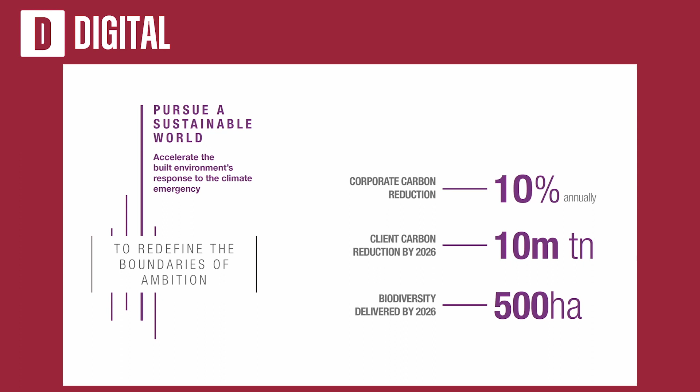So the first one's pursuing a sustainable world. The second one's more around growing together. And again, you can see that we've got some KPIs here, some measures, some metrics that flow down from the strategy through into my objectives, my team's objectives. So again, you can see it's not just what we do going to work every day to go deliver assets, it's to go hit these KPIs, and again, how it links to our innovation strategy. And then the final one.

This is probably particularly close to my heart as head of digital, delivering distinctive value, and very much around good days at work. How do we improve or increase our client satisfaction? But then some really tangible ones around annual margin growth, and is clearly called out there our R&D investment by 2026, and I'll describe how we manage that and how we grow that shortly.

But it all ties into our sustainability goals, our ESG framework. So again, just sort of reinforces KPIs with real numbers that we're all measured against. So we have to find ways to deliver those, and we're not going to achieve that through traditional ways of working.

So hopefully, you get that what I'm trying to do is set the scene as to why innovation is important. I'll now spend a couple of minutes talking about Mace. So I'll describe some things that I didn't know about before I joined, but again, we'll start to provide context for why our innovation strategy is the way it is and why it's so important.

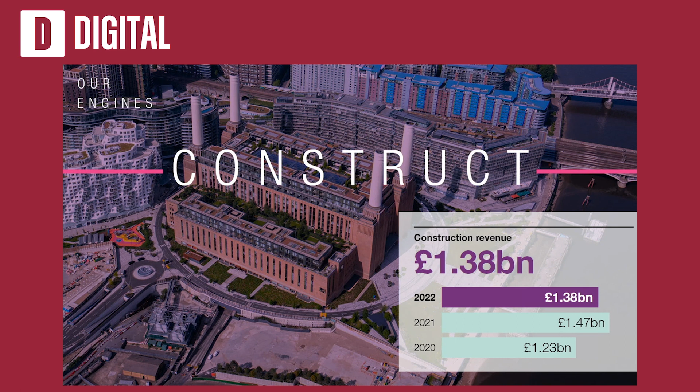And then a little bit about our performance. So there's the two engines. We've got the consult engine, that's the one that's rapidly growing at the moment. And the construct engine is probably the one that we're most famous for. And then here are some of the achievements of how we're stacking up to those priorities and those KPIs. So over the last couple of years, we're continuously on the right direction to achieve those targets.

So that's the reason for taking you through that, that's sort of setting the scene, and I'm hopefully in sort of 2-3 minutes there or 5 minutes, you've got to sort of understand the why. Does that make sense? You can sort of see why innovation is important to Mace?

Okay, very good. So now we'll start to look at the how, and I'll take you through some of the history. So back in 2017 was the first innovation strategy at Mace, and it was around 4 key themes.

So the first one around digital technology. Second one around assembly. So this is where we're starting to introduce the idea of modern methods of construction, offsite prefab, all the things that we're seeing now. Operate was key. It was a key business unit within Mace that was sold at the end of last year. But the thought and the thinking that goes behind it is still relevant.

We're working with our clients every day to help them understand what's going on in the operate space. How do they get better outcomes from the assets that they've created? And then finally around lean and continuous improvement.

So if we take those 4 themes, I'll show you how they've grown over time. We've got a number of innovation multipliers.

If we look at the type of work that we do, we're obviously involved in the design process. We then plan our work and then go deliver that work. The innovation themes were then seen as multipliers for the work that we do.

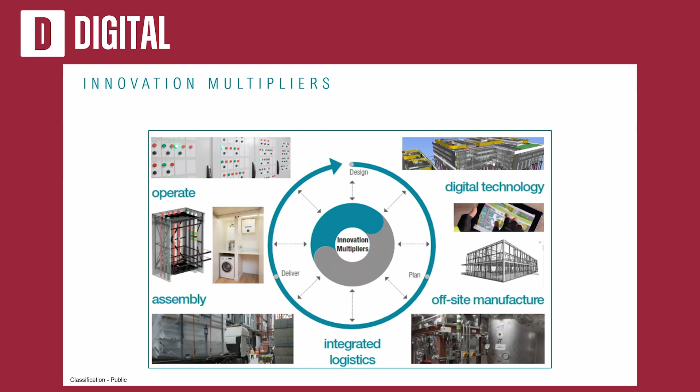So I'll take you through the journey of why innovation became important, and talk about the more recent one, how that accelerated our innovation journey. There's a number of projects here - we'll talk a bit about the Shard, we'll talk a bit about the Jump Factory. We've got a video to show you there.

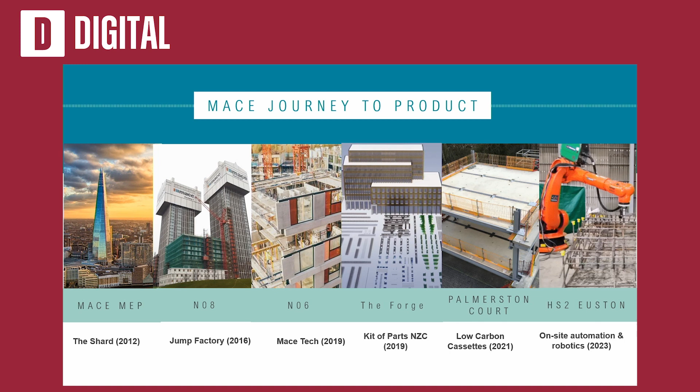Mace Tech is where we then spun off a separate business around the innovative ways of working that came from the Jump Factory. Then it starts to get a little bit more digital as we talk about the kit of parts at the Forge, and then the heavy focus on reducing carbon, example there at Palmerston Court, and then some of the robotics that we have.

Very early on, in order to deliver the Shard - super complex project, very compressed timelines - again we had control of the MEP delivery ourselves. This is one of the first steps into prefabrication and off-site assembly to go deliver that.

I'm sure if you delivered it you wouldn't say it was simple, but it's a fairly simple concept around using modular plant rooms and the equipment that goes within that, and then how do we get that through the building in the risers. A lot of thought went into how do we assemble that not at the workface but somewhere else, and then get them to the project, and the components used within that.

That's really where a lot of the initial thinking around how we bring innovative ways of working to our project sites came from. What I'm going to go on to next is an example of the rising factory. It's a bit long, a couple of minutes, but what I think it does show is how we've turned a process that might take 2 or more months to go up a floor into something achievable within a week.

And if you enjoy construction, like I do, you'll enjoy it. It's all about how we created a sort of factory-like environment on a live construction project.

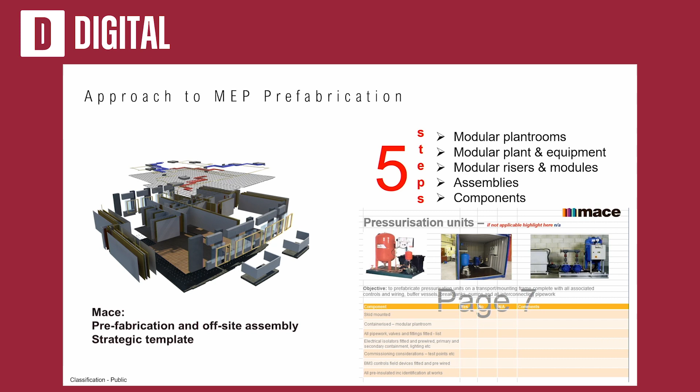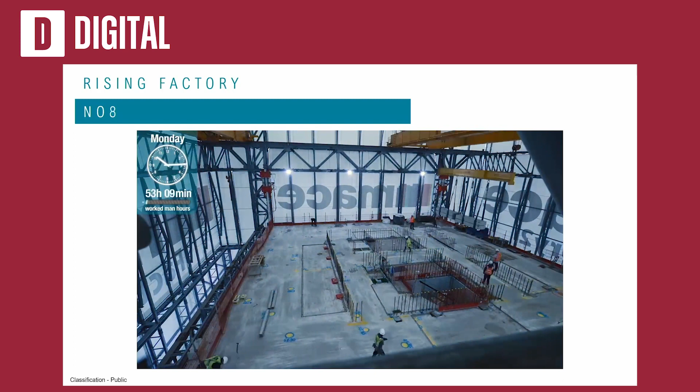There we go. One thing I will point out, if you look to the top left, you can see how the hours are moving.

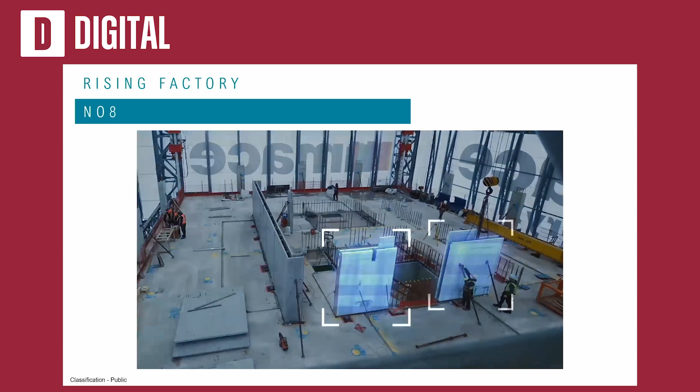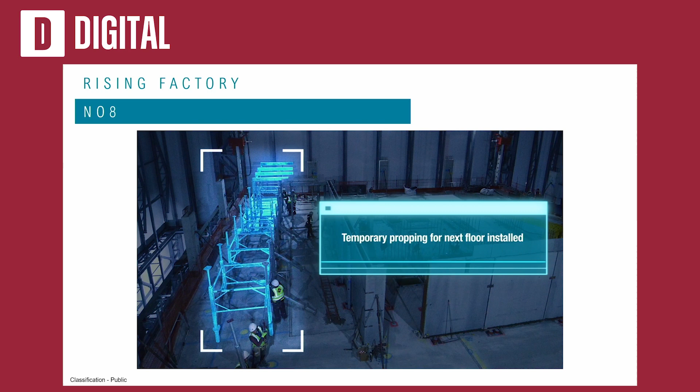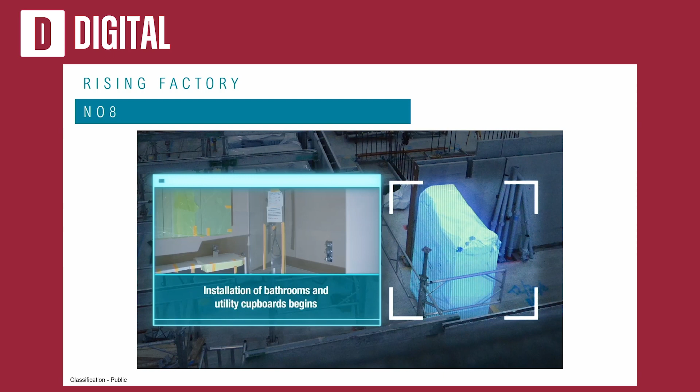So this is all at the top of a building. You can see the way it's encased and covered, so the feeling is that it's a controlled environment. It's trying to replicate a factory type environment on a live construction project.

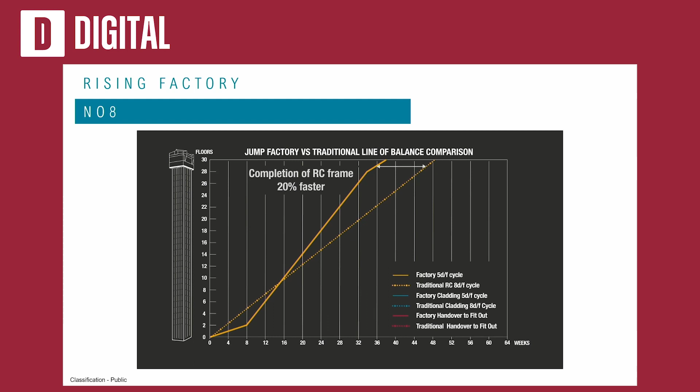So apologies, it's a bit of a long video, but what I do like about it is when they move the factory up, it looks like the floor dropped, but that's not the case - that's the structure moving up.

You can see a lot of work then has to go into the pre-construction phase. You're spending a lot of time planning it out and making sure that you've got all the right parts in the right place before you start construction. It can be concerning - people want to see progress straight away. But it was a useful exercise to go spend the time, go prove the concept, and then deliver in a much faster time.

I think one of the things that's disappointing, it always hurts me when you see the wet concrete getting applied at the end. You think, well, that's a real shame to see that. But I'll show you what we've done around that shortly.

But digital was one of the key elements in this. Part of that was creating the kit of parts, so having to work out exactly what all the different parts are and how they go together, and then how we could bring that to assembly off-site. I'll start to show you some of the other areas we've started to work on.

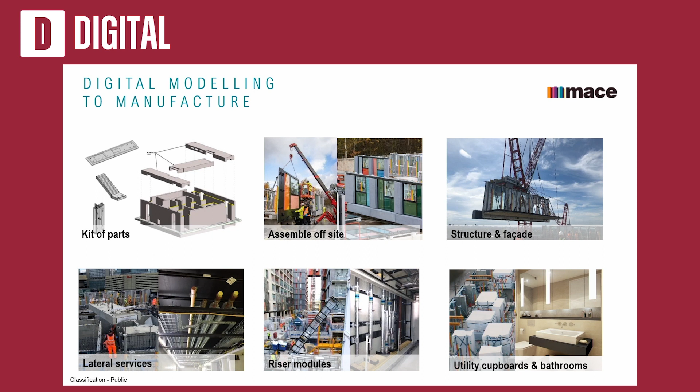Here's an example of the infrastructure that's required in order to do that. That's the yard, where I'll be able to show you the path of materials moving through in a moment.

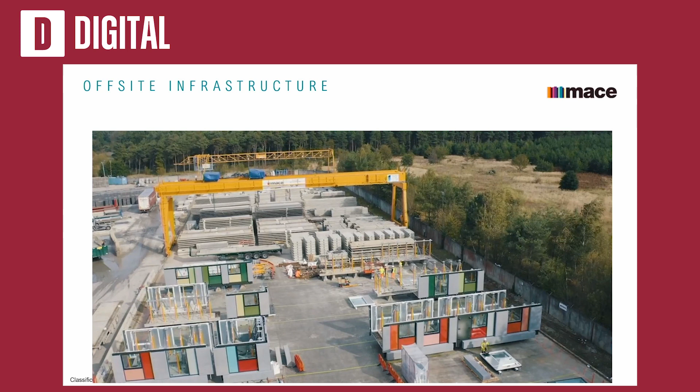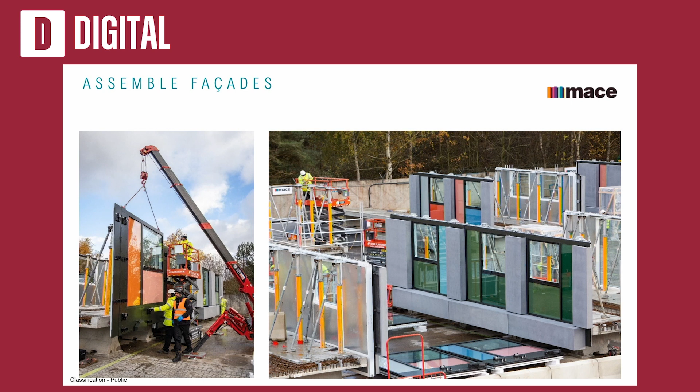But it's not just concrete and MEP that we're doing this for. We've now started, for some time, if you're particularly interested in facades, doing the same with facades and starting to understand what that looks like in assembly.

If you get a chance on the way home, go to London Bridge and stand underneath the Shard, you'll be able to see this in action at the moment on one of our projects there. It was great, I was there a couple of days ago, and as a bit of a geek, stood there for 20 minutes watching all these panels go in and get erected.

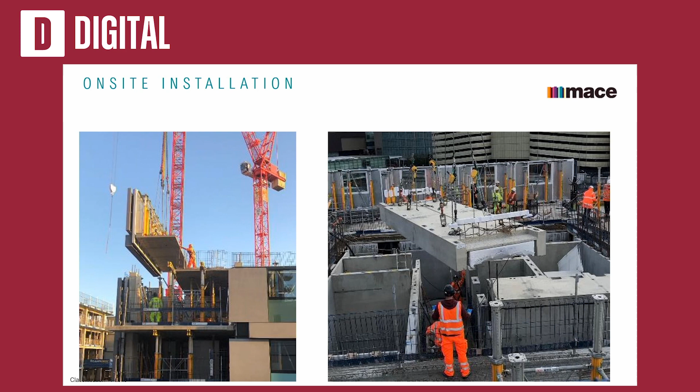There are lots of areas where we've been able to use this way of working. I'll move on to tracking and logistics. It's pretty hard to see here, but what we can do is track the path of one of these units as they make their way through the manufacturing and assembly process.

So here is where everything is cast, and everything is then tagged, so we can see when it's created. We can also see how that's working during the design process, but when we get to the physical world, once it's cast, we're able to start to track it.

It then goes into the Mace Tech supermarket, where all the materials are, and as they get assembled, we keep scanning the tag to understand where they are in the process, until eventually they get lifted onto the lorry so we know where they are.

We can then track that through until it gets to site. That's very important, especially in London with congested projects. Just-in-time delivery is super important, we've got to make sure the hook is there ready to go, so we can get just-in-time delivery going.

We can see it land on the building and see where it gets installed. We can also use that to see when it's been tested and we're happy with it. So yeah, we've got full transparency of where we are in the process.

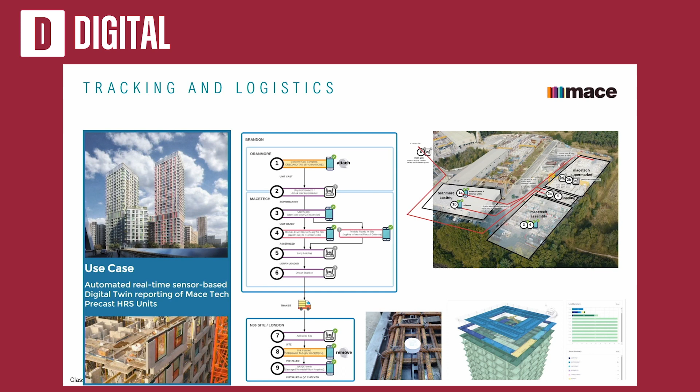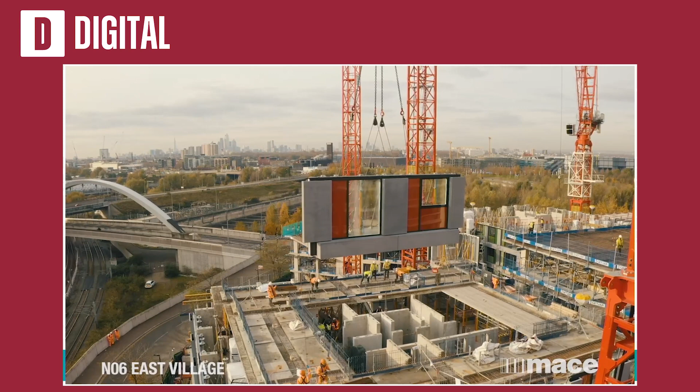So that was an example of the jump factory. We then moved on from that and had a second iteration of it. I won't play the full video of this, but we were able to start to understand from the first one where the areas for opportunity were.

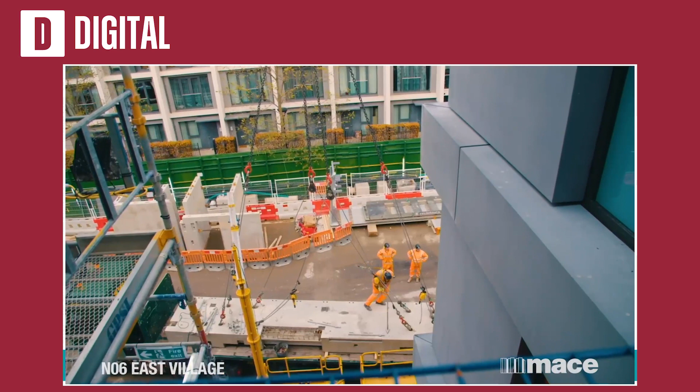It was just some of the simple things around logistics, how we were moving materials, how we were moving people around that space. We were able to find further improvements. That's an example of seeing what the floor plan was like, but this shows you the types of improvements we've been getting over a traditional build.

I'll just leave that there for one moment. There's a few things to call out. If you start to look at just the number of resources for us, that's super helpful.

It means we can have smaller canteens, it's easier to manage logistics, so it starts to become more productive. The productivity of the GVA, that's how we manage productivity within Mace. You can see a massive increase there, but it was a lot of things just around some certainty, for us and the client, around programme and cost - some huge benefits.

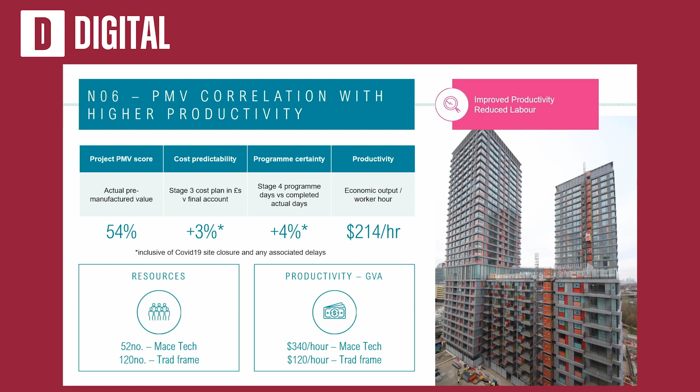The next iteration was the Forge, and this is where we've been more focused on the digital aspect. You can see in the picture the kit of parts. We're now able to get down a few levels of detail and start to assemble and create the sub-assemblies that will then become the things we take to site.

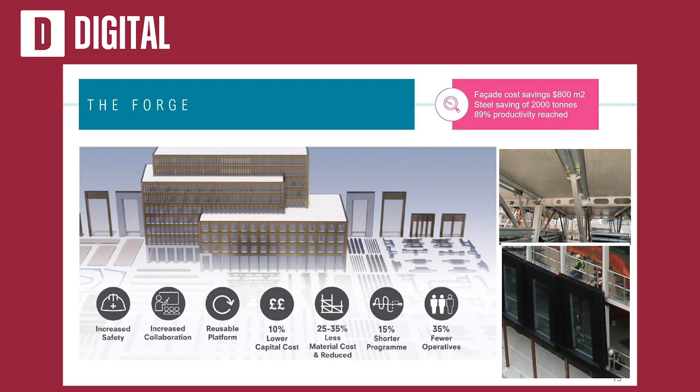The big focus at the moment has been around carbon. This is the example at Palmerston Court, where we're creating these low carbon cassettes. They're getting delivered to site - lower carbon, fewer people on site, safer to deliver, and quicker.

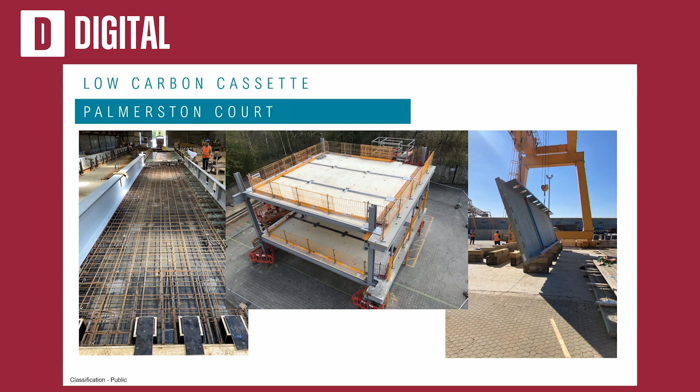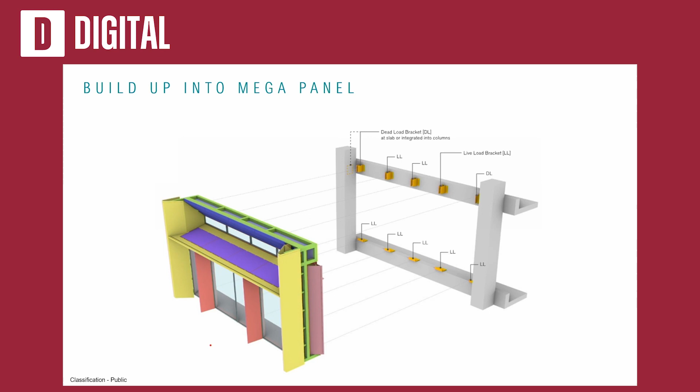Plenty of benefits there. And for those that really enjoy facades, an example here of the mega panel where we're able to get all the different components, bring them together, and then lift them as one, which you saw in the previous video.

So those were some of the things that were born out of the first innovation strategy. I'll now take us through where we are now. This is the Innovation Strategy version 2, called Speed and Scale, launched in 2022. Again, if you go to our website, there's pages and pages of it. It's very open, and we encourage everyone, supply chain members, to come and work with us on that. But to describe it, there are three focus areas, three innovation areas.

Construction to production, that's a lot of what you've just been seeing around modern methods of construction, net zero carbon, and digital and data. So those are the things we're looking for. To explain a little more, at the bottom we've got the innovation funds. If you remember, I mentioned the 3.5% R&D fund target, so I'll explain how we manage that in a moment. The strategic priorities are the four that I mentioned before.

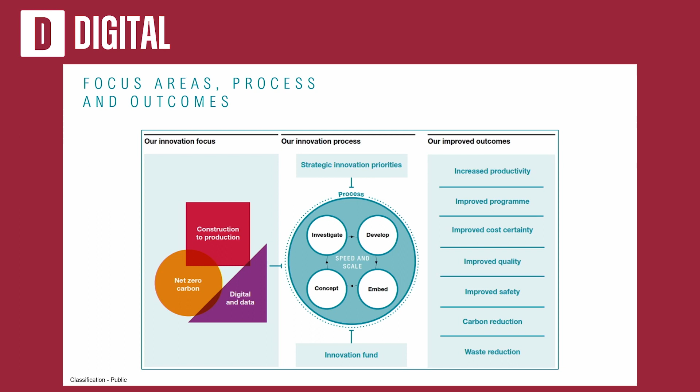It then goes into the innovation engine, so concept, investigate, develop and embed. You'll see why that's important in a moment, and then the expected outcomes. I'll skip this slide.

So the first one I'll talk about is connected production. Up on the top left, you'll see the design catalogue. That's where we've been working with our supply chain to understand the components that are there and available, and we use those in the design phase with our design configuration tool, so we can bring those components together to create the building during the design phase. Then, working with the supply chain, we can start to create those components, hopefully standardised components, and start to create those sub-assemblies.

The bit where it all starts to come together is if we can pre-assemble those — some of it you might see, for example, in that jump factory, where we're able to get those whole pieces brought to site straight away. Or sometimes we may have to find a location closer to the project and do some of the assembly there, so that they can be brought to site and then lifted onto the project, as you see in the assembly phase, and then finally we hand it over for the client to operate. So that's what the connected production piece looks like, and that's effectively what I was showing you in some of the slides we saw before.

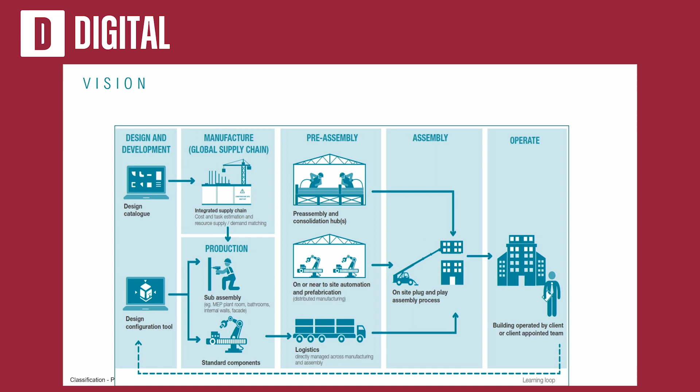The meetings I enjoy more are when we're in there with members of the supply chain. We're able to get real data and get everyone working collaboratively to find a solution. And we've got a number of tools that help us do that.

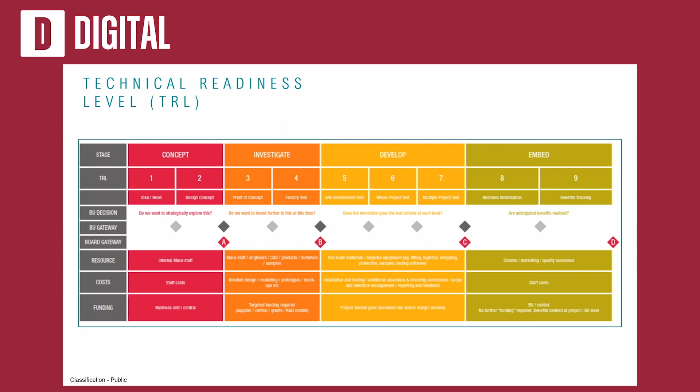And then briefly on the innovation fund. This is where some of the £500 comes from, but also what we invest into the projects going through the test phase. We've got the RDEC claim. Does everyone know what RDEC is?

It's the sort of claim you can get for effectively doing R&D. That's money that comes back. Some of that gets redistributed to the engines - remember, the engines are parts of the business - and part of that then goes into the innovation fund to allow us to reinvest. That's how we've created that R&D fund. If you remember, I said 3.5% was going to be spent on R&D. This is where a large chunk of it comes from.

But also, we're always looking for ways to partner with other organisations. That could be a client, somebody in the supply chain, or somebody with a great idea. We've had a lot of success developing innovations in that way. So I'll briefly run through some of the successes.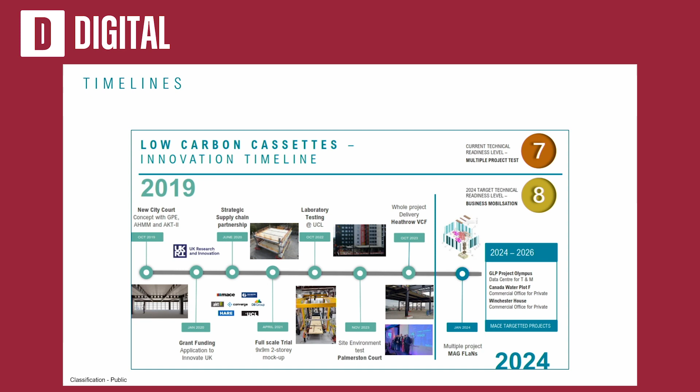Here's an example of how that's accelerating. The data sheets are basically the products that come together to create a larger product on a project. In November last year, we had 32 of those. Last month we had 150 data sheets, so you can see we're on an exponential curve.

The dashboards that we create, the MEB, our executive board, look at that every quarter. We'll go through it together just to understand where we are and how we're tracking against our innovation fund. So sponsorship right from the very top.

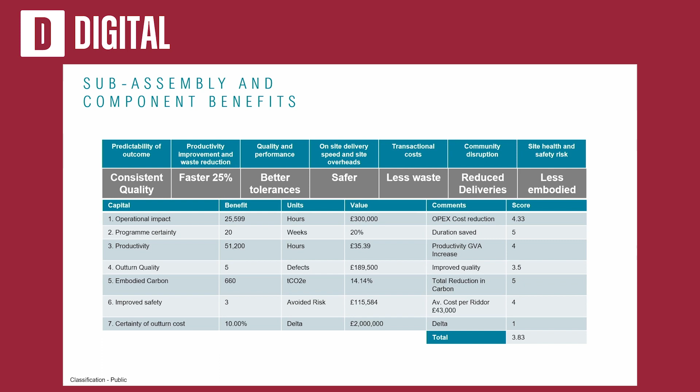There's an example of one of those product guides. This is an example of the benefits - the benefits realization plan. So everything is measured, that's how we know how well we're doing and if we want to accelerate some and perhaps not others.

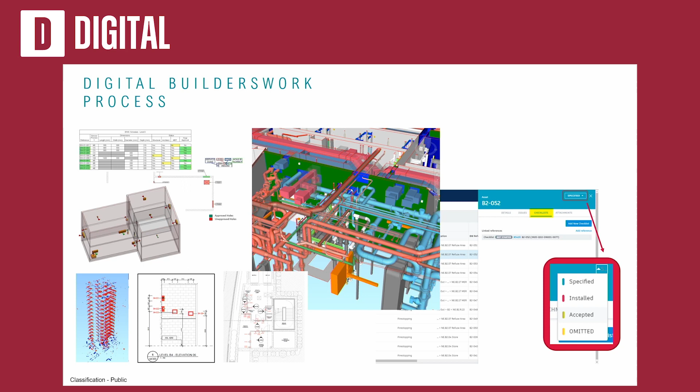Some things that happened a few years ago are now common practice - around coordination, issue management, how we're doing that on live projects at the moment. This is quite interesting one, the digital builderswork process - fairly complex, so we're now using that to make sure things are going better. It's helping us with record keeping, records management. Big investment in automating our cost estimation, and we've had some great success there.

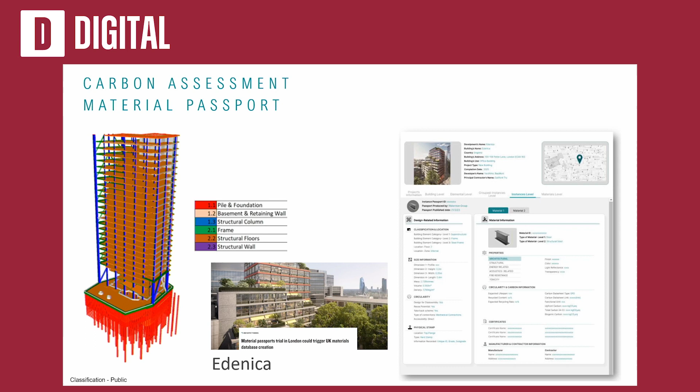Carbon assessment is becoming increasingly important. Our clients are asking for it, we want to do it because we're measuring against it, but also looking at our materials - where they are, where they've come from and how they've got to the projects and how they're being used. That will also feed into the golden thread. Using the tools, looking at how things get from the factory to the project.

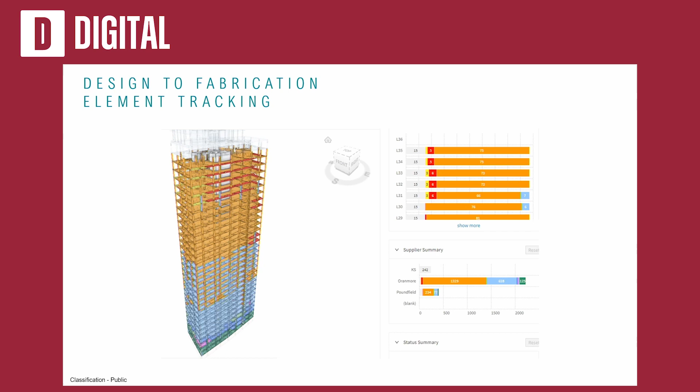This is quite an interesting one - record keeping on our projects. We've got on many of our projects cameras to understand how we're progressing on site.

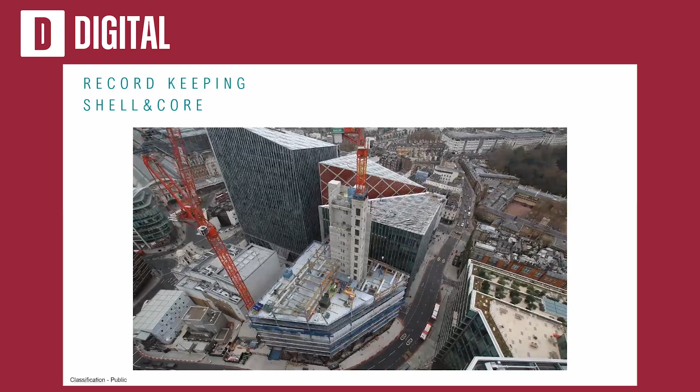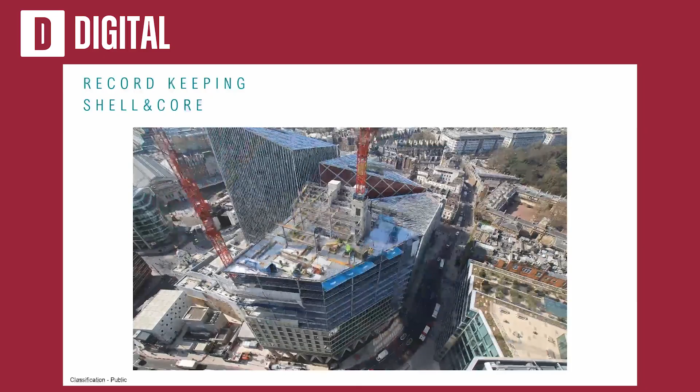And why this is interesting is it gives you a different perspective. I didn't get this till a couple of weeks ago, working with one of our structures directors. He was able to spot inefficiencies in how we were laying things out on the slab that you couldn't see when you're there on the slab. It was only when you've got that bird's eye view you can see some really obvious ways that we can improve our productivity. That's one I didn't think I was going to be impressed with, but I was.

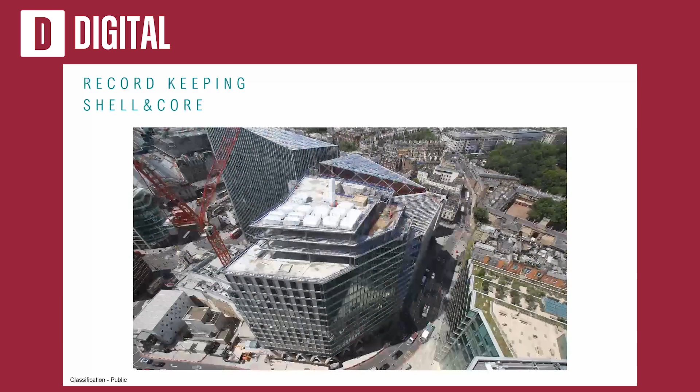That's one of our projects. I was more focused on this bit, coming from a digital bias, which was how we have that sort of view of what's going on in real life. We can then compare that with the model, compare that with the 4D model, so we can see what is there now versus what should be there now.

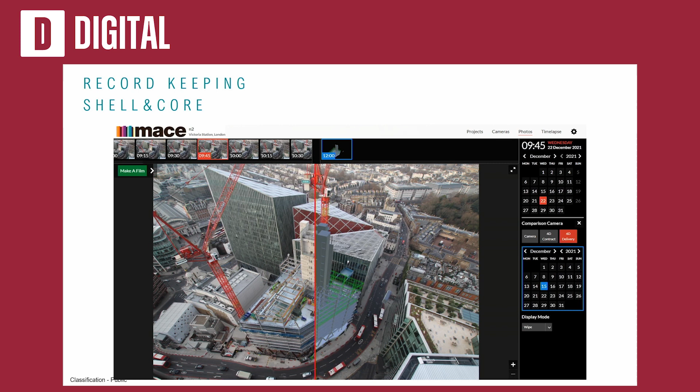So we're getting great value from that. Also doing the same on the inside of the building. This has been super helpful with record keeping, working with organisations to help us capture this information, but then we can run some data and analytics from it, so understanding how we're going with progress.

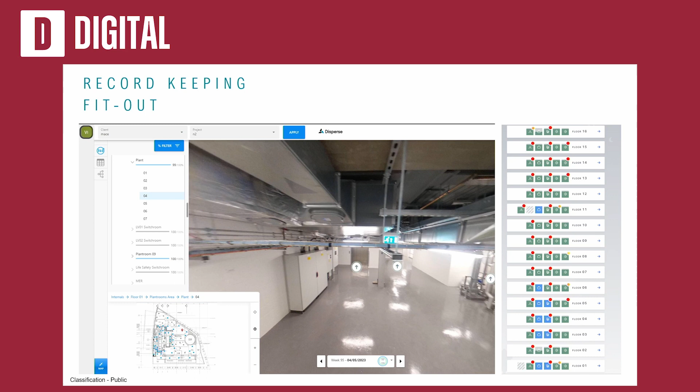Health and safety teams can use it to see what's going on a project. It helps us with claims as well, so if someone says we're unable to get into an area, we can show you that you can, or the other way around. We can appreciate and understand it, and manage that a little bit better.

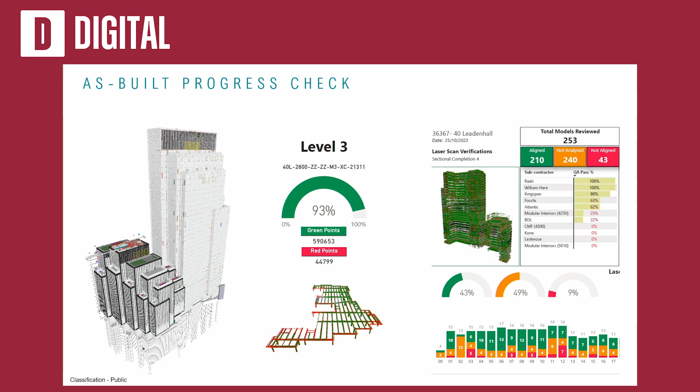We can also check as-built progress, taking it all the way from design through to construction, then actually have we got all the information and data we have to hand over at the end, something that's often forgotten. This was built in-house on one of our projects, where we've been taking scans of our buildings as it's going up and comparing that to the model to see where we're out of tolerance. We've been able to identify issues a lot earlier and put some remediation in place.

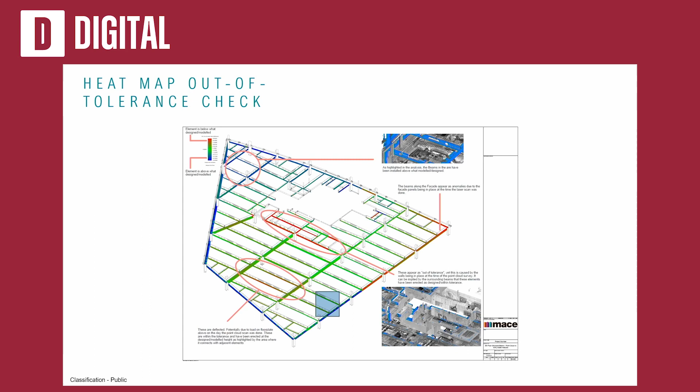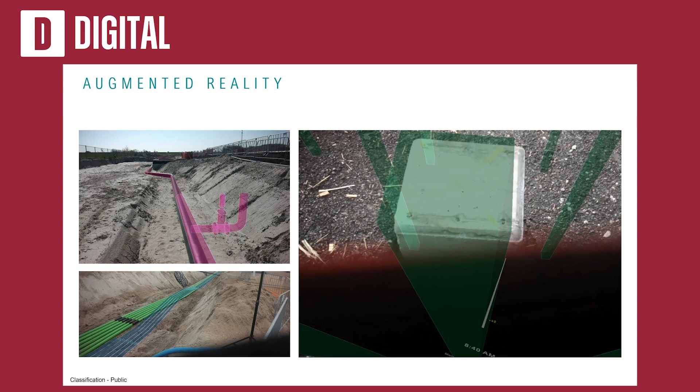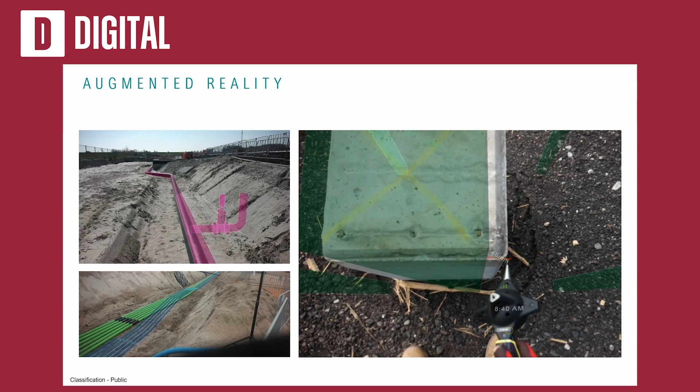So this was, we used augmented reality to understand tolerances on site during the construction process. I'm sure some of you will recognise the tool we're using. The issue is not with the tool. The tool works really well, but when you actually try to understand where the benefits are, the return on investment just wasn't there. It took a little while to set up.

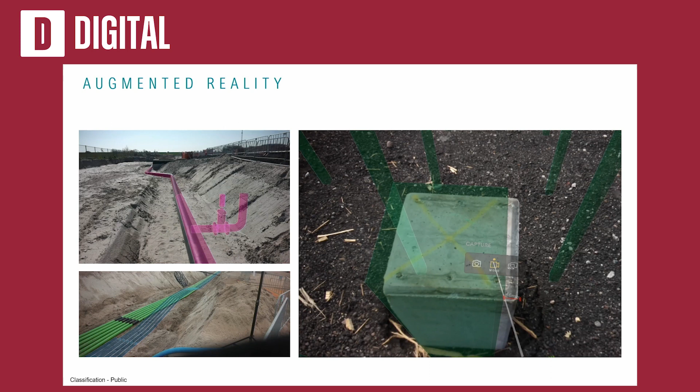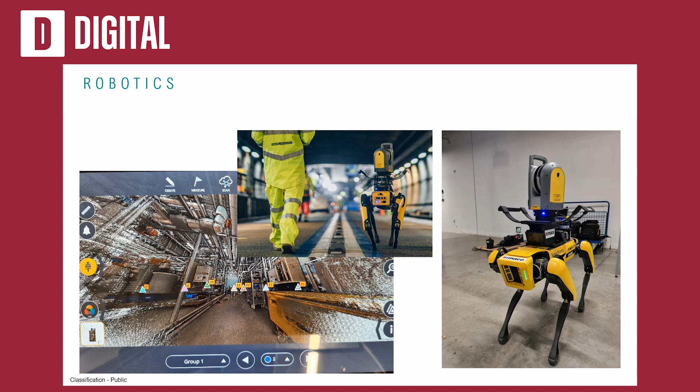Hi, hello. Yeah? Okay. Hi, I just wanted to have a greater understanding a little bit from you in terms of how easily individual components of it are to be replaced.

Modular construction is not new, it's been 20 or more years. Some of the buildings that were done initially are now coming to the point where they are no longer usable, they have to be dismantled, etc. So that is my question: how to make it long term.

Yeah, so agreed, it's not new. I think the bit that is new is being able to systemize it and do it at scale.

We were talking about this recently, and it's been in the context of creating the golden thread. So it's how do we ensure that things are being built in the right way, that they're getting installed in the right way, how they're being maintained in the right way, and then how do we dismantle it again afterwards, making sure that's thought through right at the beginning, that there's a requirement to do that. So it's making sure we capture that information, but then still make it available for somebody 20, 30, 40 years down the line.

That's something we're actively working on. I can't tell you how we've done it on those, I don't know myself, but I agree it's an issue and we're working on how to do that, because you're right, it's a requirement. Are there any more questions?